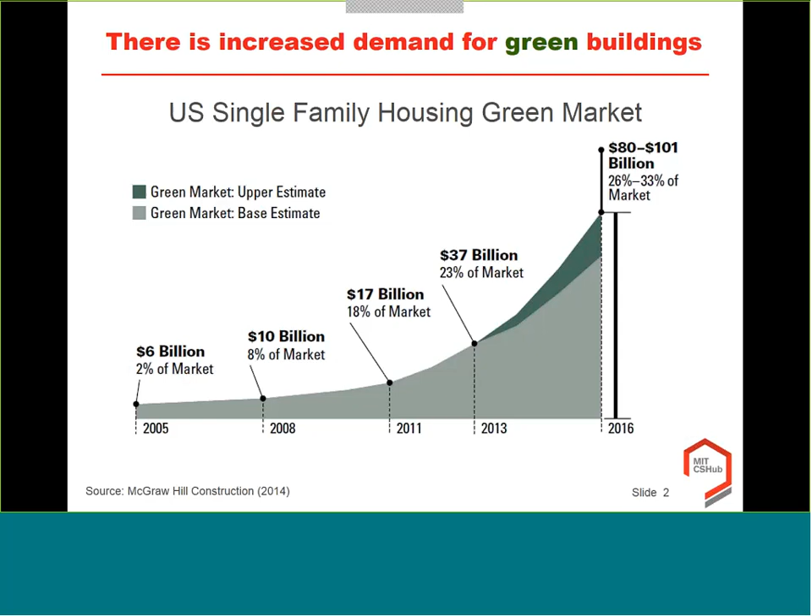Part of the motivation for our work is that there's a real increased demand for green buildings. This chart shows U.S. single-family housing green market projections done by McGraw-Hill construction estimates, and it shows really significant growth in the housing space. Here's another chart provided by the U.S. Green Building Council showing national LEED construction spending, and actually the rate at which the green building industry is growing is faster than non-green construction.

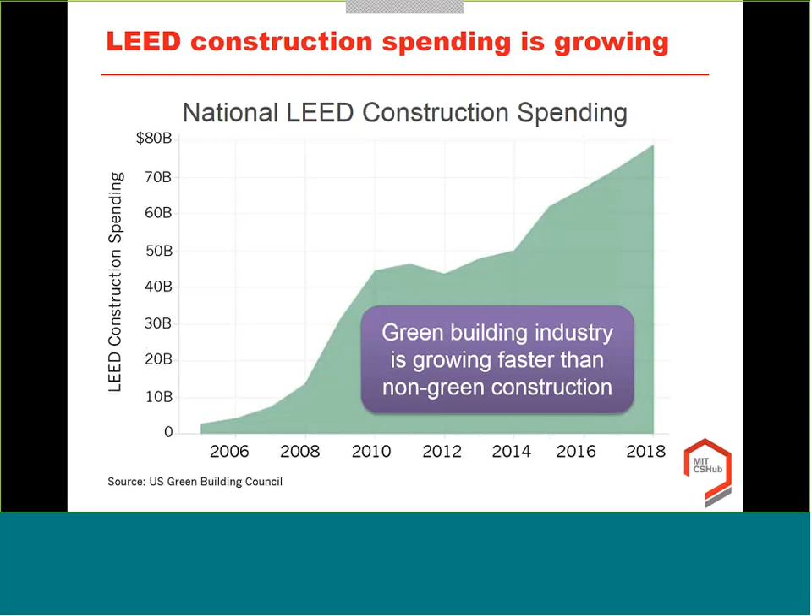One of the interesting things about what's driving this demand, and this once again comes from the McGraw-Hill construction study, is that client demand is one of those key drivers, whether it's in the U.S. or global. So clearly there's a lot of demand for green buildings, but we still have a question about what does it mean to be green. People say they want a green building, but how do you quantify that?

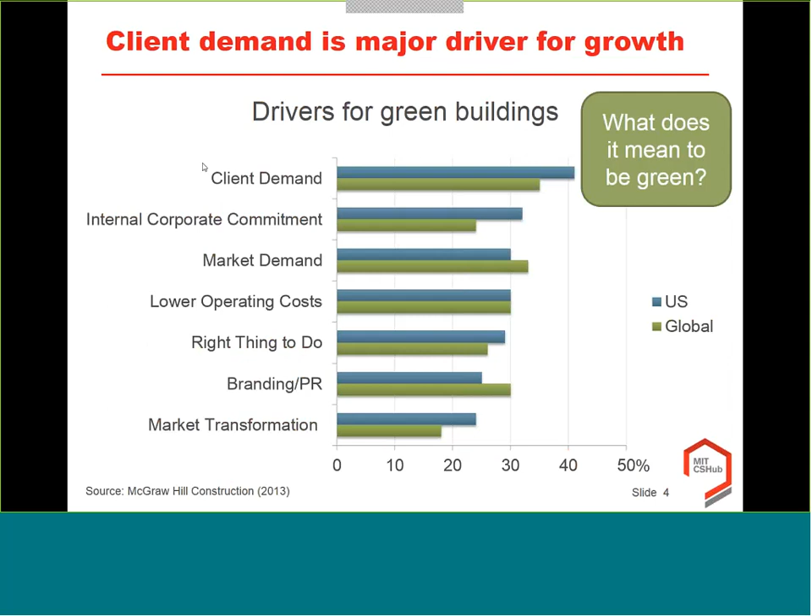We can actually draw some inspiration on this particular topic from another study that was done by UL, called the Sins of Greenwashing. It's a little out of date now, but I think the premise still holds. It's more about consumer products, but what they did is study many different types of products across a variety of sectors, whether it be electronics or office products. In 2009 they found

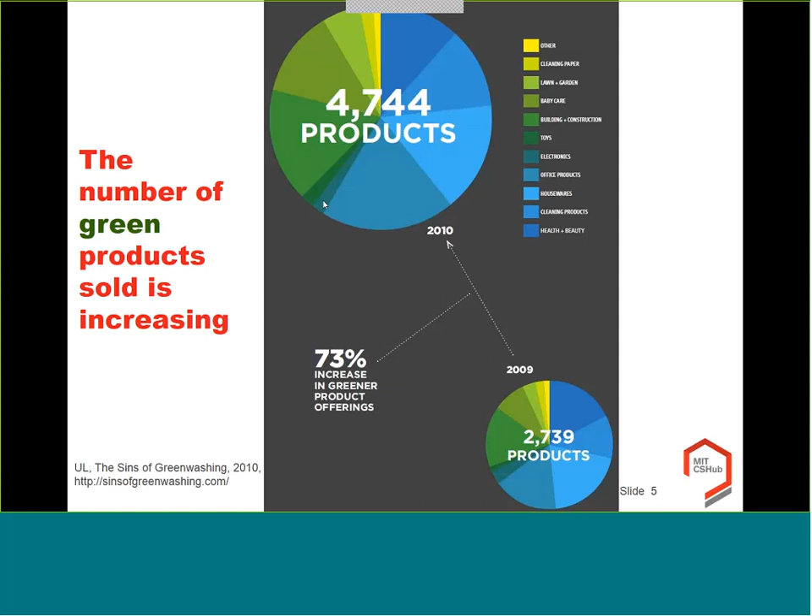about 2,700 products that claimed to be green, and in 2010 they found an increase even more, 4,700 or so. What they did is characterize whether or not these supposed green products had made claims that could not be justified, characterizing these as having 7 different sins of greenwashing. This chart shows the do-it-yourself building or construction sector, so not quite what we're going to be talking about, but also this is more like places like a Home Depot. Without going into a lot of the details, they basically found that pretty much all of the green products make at least one claim about them being green that may or may not be true. Sometimes it's just no proof, but sometimes they have a label that there isn't justification for. So clearly this is a hard thing to determine what green means.

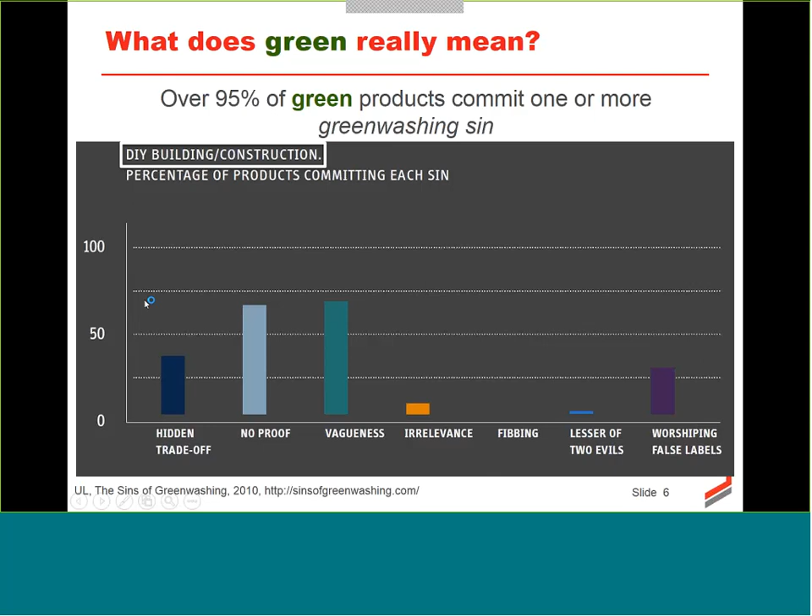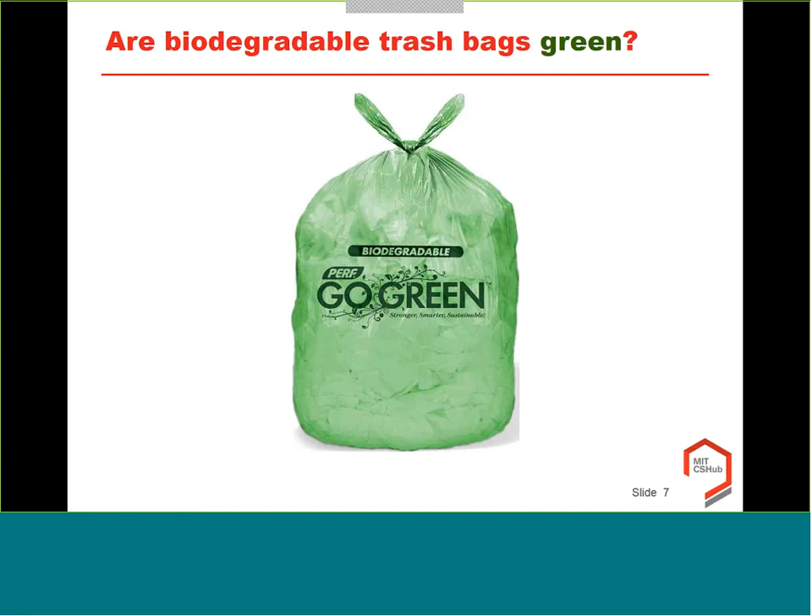One of my favorite examples is biodegradable trash bags. They make it really hard for you to think that they're not green because obviously the bag itself is green. But of course, the challenge is that if you put a biodegradable trash bag into a landfill, first of all, it probably won't degrade that much. And if it does, it actually will likely turn to methane, which is worse than carbon dioxide when it comes to climate change. So this is tricky.

One of the good things about what UL does in trying to address this is to be honest about the whole life cycle-based environmental impacts of your products, acknowledge them, and address them one step at a time. I really like that, and I think that's been a core part of what we're trying to do as well: analyze the whole life cycle perspective and then see what you can do.

This life cycle perspective is really important for these green claims, because the reality is there are many mechanisms for reducing environmental impact and cost. When we look across the life cycle of any product, people often will say, well, I have a green material because perhaps it used recycled content or it's low energy to produce. But there are other opportunities to have a green building, let's say in this case.

If you can design a building to use less material, i.e. by using a stronger material, then that can certainly help reduce environmental impact and possibly cost. The same thing with longer lasting designs. But there are other opportunities in the use phase, such as reducing energy consumption or heat island effects.

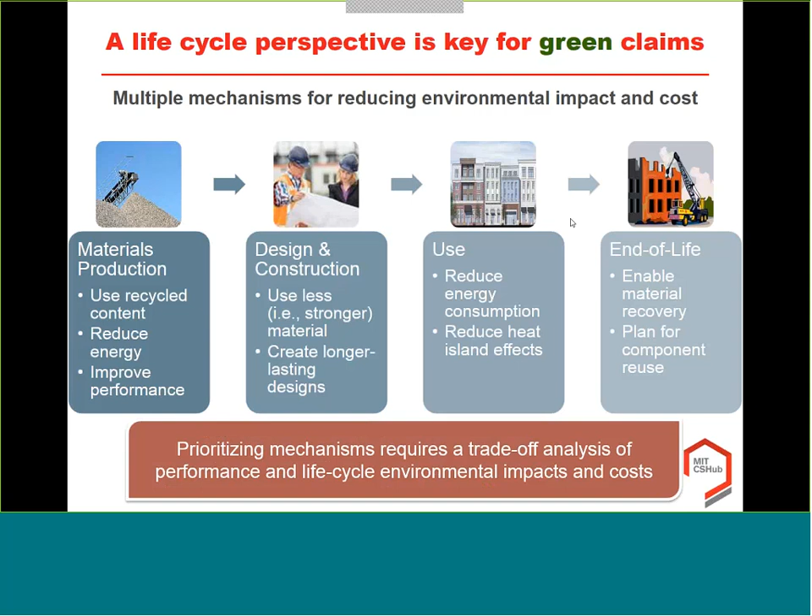And of course, anything that can happen at end of life, either by enabling material recovery or planning for component reuse, can be beneficial as well. The trick is that you really need to prioritize these mechanisms, and to do so, you have to do a trade-off analysis of performance, life cycle environmental impacts, and cost.

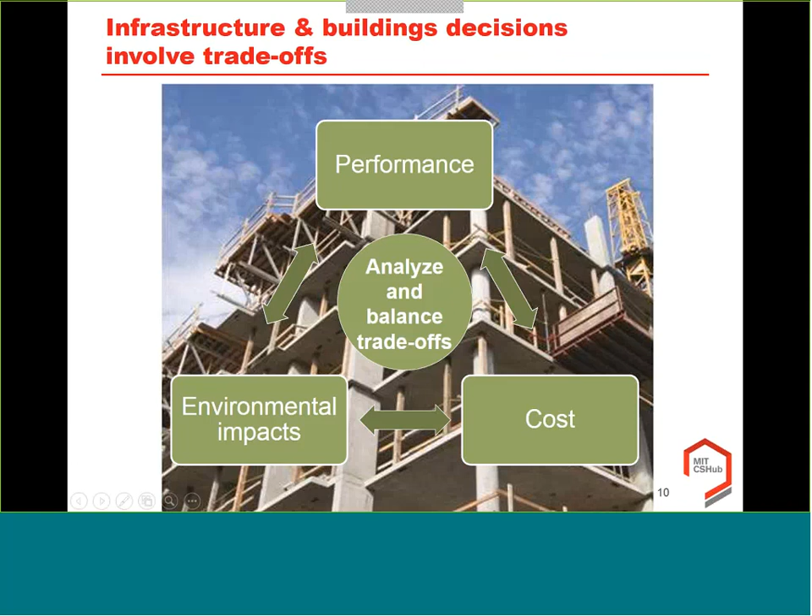This is really important for us to talk about. Keep in mind that we are asking to have something built because we're looking for some kind of performance, whether it be providing shelter, a working environment, or a retail environment. But there are trade-offs about cost and environmental impacts, and so we want to look at all those things together.

So when it comes to the research we're doing at the Concrete Sustainability Hub related to building life cycle assessment, our objectives are to identify the key drivers of building environmental impacts, the state of life cycle assessment in the building design process, and then to support early stage building design decisions with quantitative life cycle environmental impacts.

The approach we've taken is to conduct some detailed life cycle assessments, then step back and assess more broadly the state of life cycle assessment, and develop a streamlined life cycle assessment tool. In this presentation I'm going to spend time going into each of these topics, starting with conducting a detailed life cycle assessment.

For those who may not be familiar with the concept of life cycle assessment, it's basically an approach by which we quantify environmental impacts of a product or process from cradle to grave. We start by looking at digging materials out of the earth, transforming them into products or materials used to make different products, using those products throughout their life, and then disposing of or recovering them at end of life. So it's really what they call a cradle to grave or cradle to cradle process to quantify all of that.

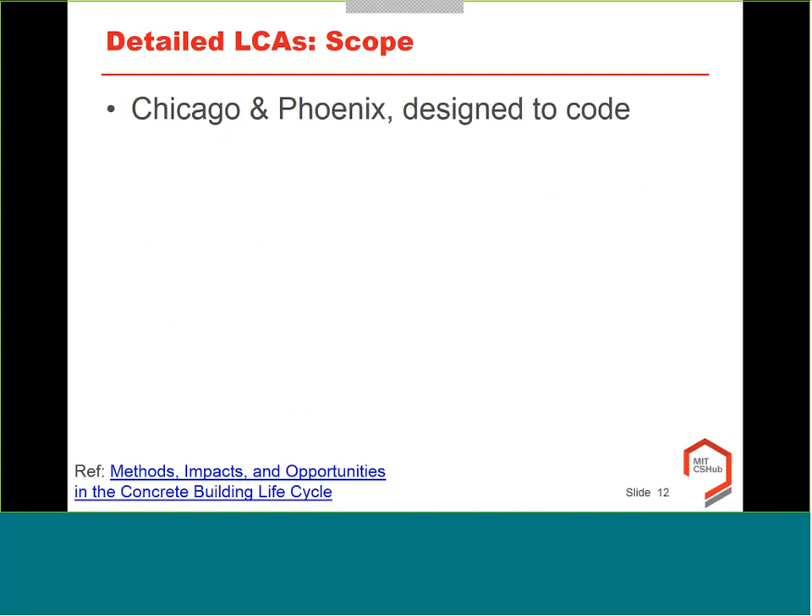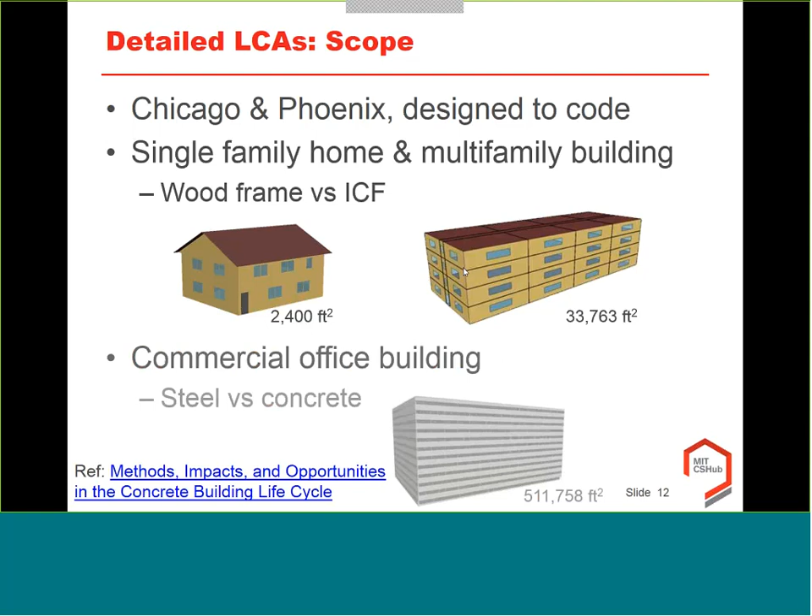When it comes to the detailed life cycle assessments we did in the Concrete Sustainability Hub, we looked at buildings in Chicago and Phoenix that were designed to code, and then looked at a couple different types of buildings: single-family homes and a multifamily building. We looked at construction of each using either wood frame construction or insulated concrete forms — a concrete technology where the forms used to make the concrete are actually insulated blocks that stay on site. This sandwich of insulation and concrete stays and provides the structural component for the building as well as insulation. We also analyzed a commercial office building constructed in both steel and concrete.

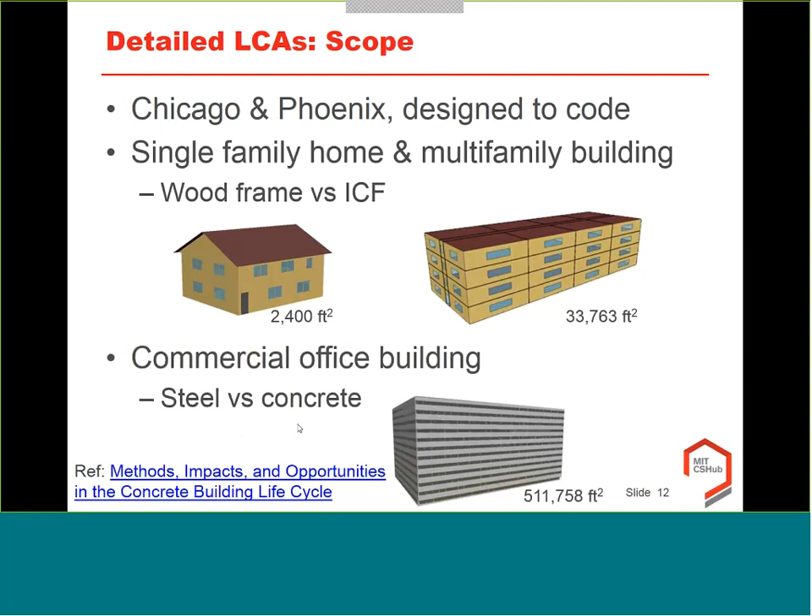There's a reference here — this title is on our website, and we have a link to it, which is one way to search for a lot more of the details. What I want to give you is just a high-level sense of some of the results.

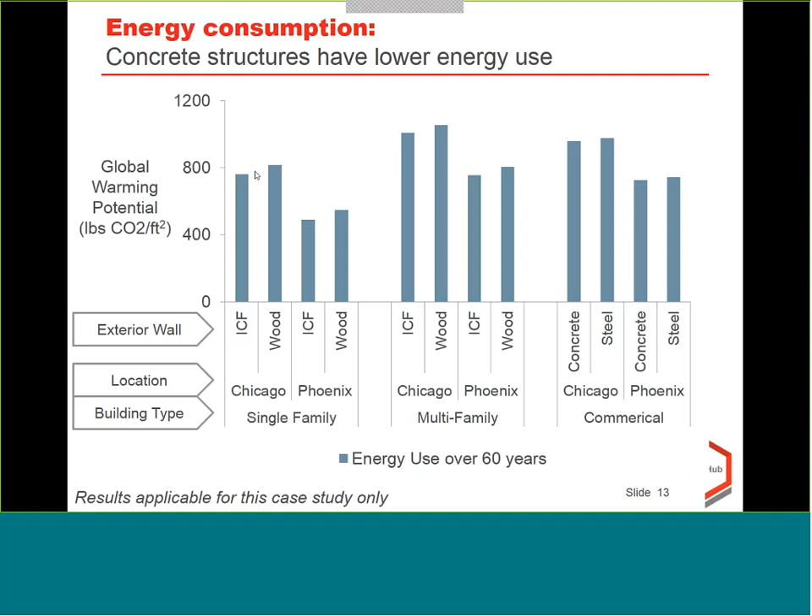So this chart is showing the energy consumption in those buildings over 60 years, which we assume to be the lifetime of the building. What's interesting is that generally, by a small margin — on the order of about 3 to 8% — the concrete structures have lower energy use.

What's also interesting now is if we look at the embodied impacts of the building. The embodied impacts are basically the environmental impacts associated with making all of these materials and then doing the construction on site. So the embodied impact for the wood and steel structures is lower for them.

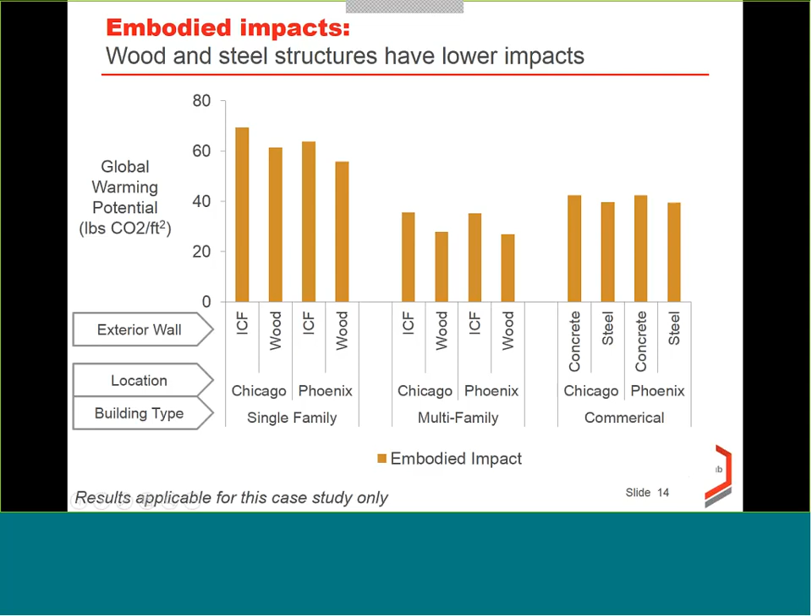Of course, what we also want to look at is what's the impact that these materials, the embodied portion, has on the energy use.

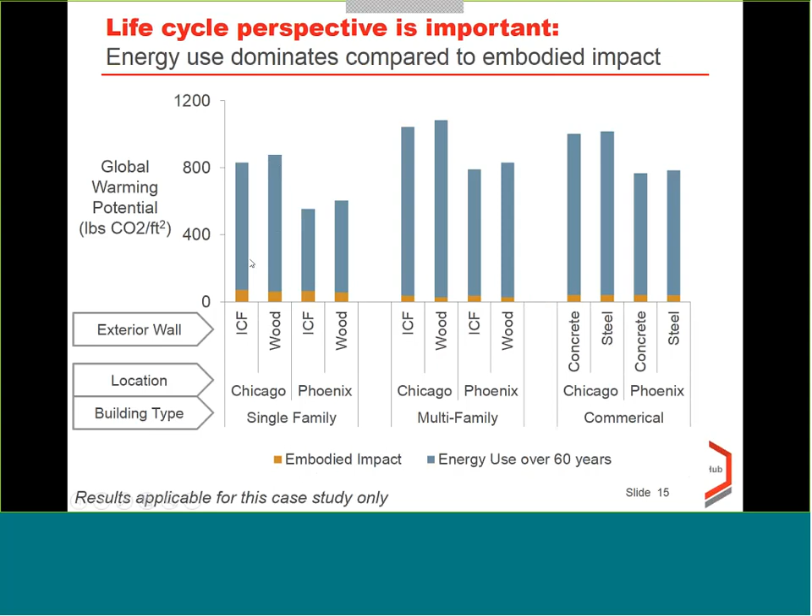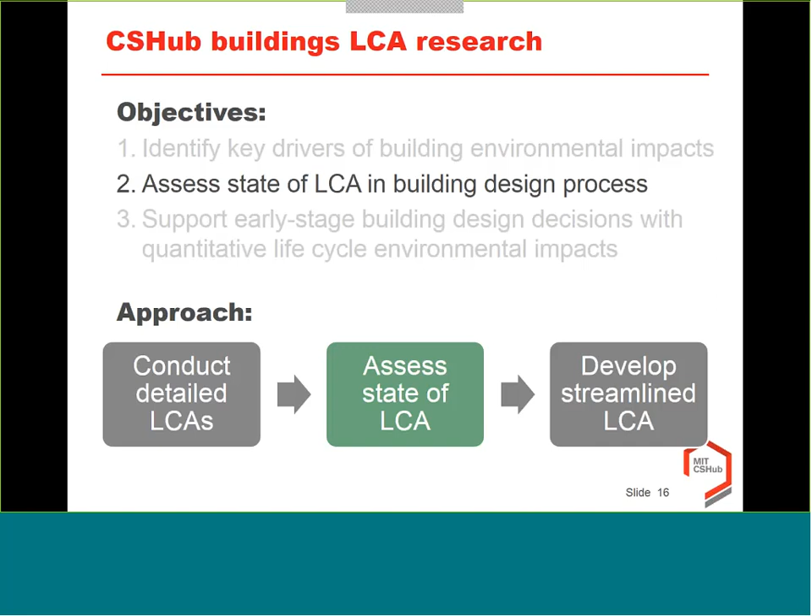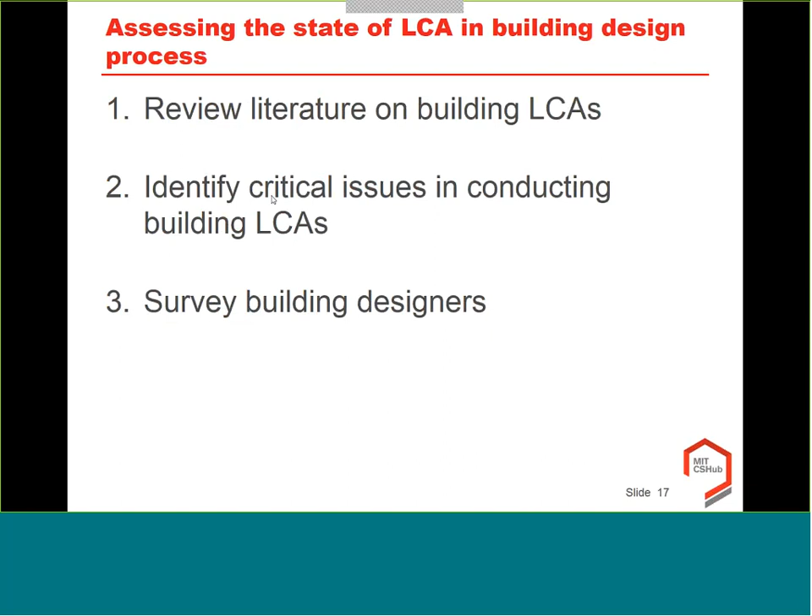All right, next topic. Our objective was to say more broadly, what's the state of life cycle assessment in the building design process? We did this through a few mechanisms. One, we reviewed the literature on building life cycle assessments to see what other people had published. Two, we did some studies to identify critical issues in conducting building life cycle assessments. And three, we did surveys of building designers. I'll go through each one, starting with the first.

There's a study on our website about this with a particular focus on residential buildings, and here are the key conclusions we learned from that literature review. One, comparisons are difficult due to variation in scope. For example, some studies look just at the embodied portion, some focus more on energy, some include end of life, some don't. So difference in scope makes it hard to compare across studies.

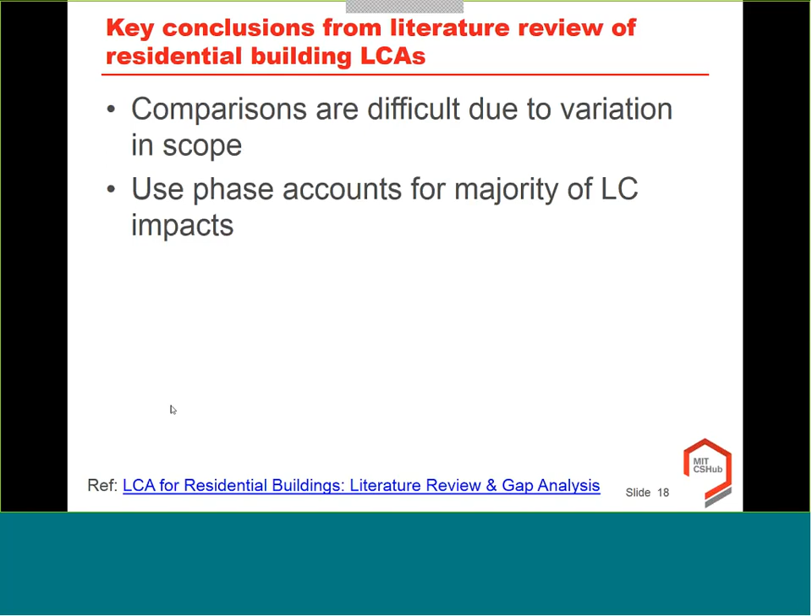However, one thing that's consistent across studies is that the use phase accounts for the majority of the life cycle impact in almost all cases.

What's also interesting is that for energy efficient designs specifically, there was significant variation in the fraction of the use phase to the total life cycle impact. In the context of the studies we were just discussing for different types of buildings, that use phase fraction was probably 80 to 90% of the total, and that number has particular variation. I'll show you a chart of that in a second.

But what's interesting is that even though there is uncertainty associated with the lifetime of these buildings or other elements in the data, it's generally not considered.

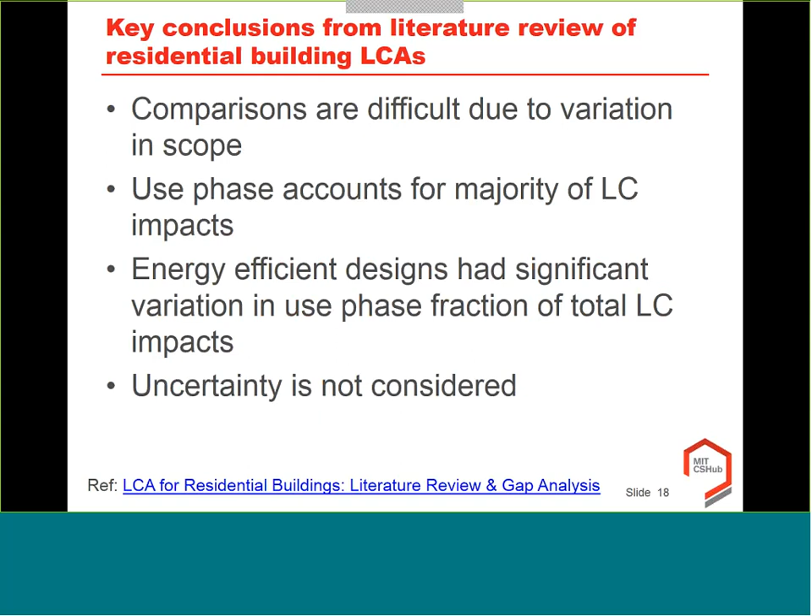We've summarized this point about the use phase and its fraction of the total, and each data point here represents different types of designs that are in buildings published in the literature. These are not necessarily actual buildings, they're studies done on building designs. The y-axis is basically, for that particular design, what percentage of the energy used is in the use phase as a percentage of the total, plotted as a function of the assumed lifetime of the building.

So for a longer lifetime, you would expect a higher fraction of energy consumption, just because you make that investment on day one in the embodied portion, but that's spread out over the whole lifetime. So the longer the lifetime, the smaller that embodied fraction is.

But what's interesting is that there isn't necessarily a clear trend. The different shapes here represent different types of buildings, and NA means they didn't specify whether it's energy efficient or code compliant. As we can see, some of these, the blue ones, are super energy efficient or energy efficient. Red means they're not code compliant, so they might have worse energy performance. We do see a lot of those having the energy performance dominate.

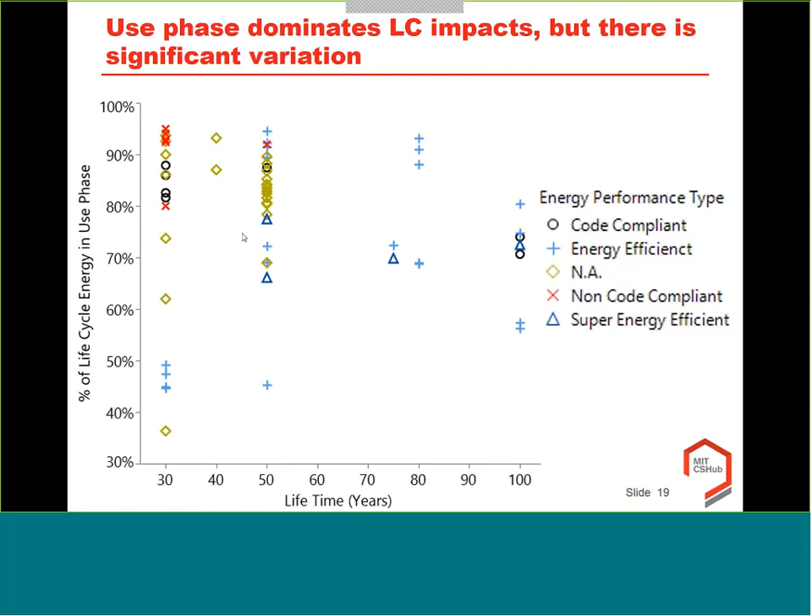But even on some of these that are considered energy efficient or super energy efficient, which one would expect to have a higher fraction of embodied environmental impact, we're still talking, even in some of the best cases, 50-50, and here's one that's quite low, in the 30s. So generally what we see, across most of these cases, is 75% and higher, except for some outliers. The key point is that the use phase really dominates this life cycle impact, but the exact amount depends on the particular case.

Another thing that we did in surveying this whole field is, after looking at the literature and spending some time looking at standards and things like that, a study called Comparing Whole Building and Building Product Environmental Performance. It's actually less of a study and more basically our synthesis of the critical issues when comparing building environmental performance.

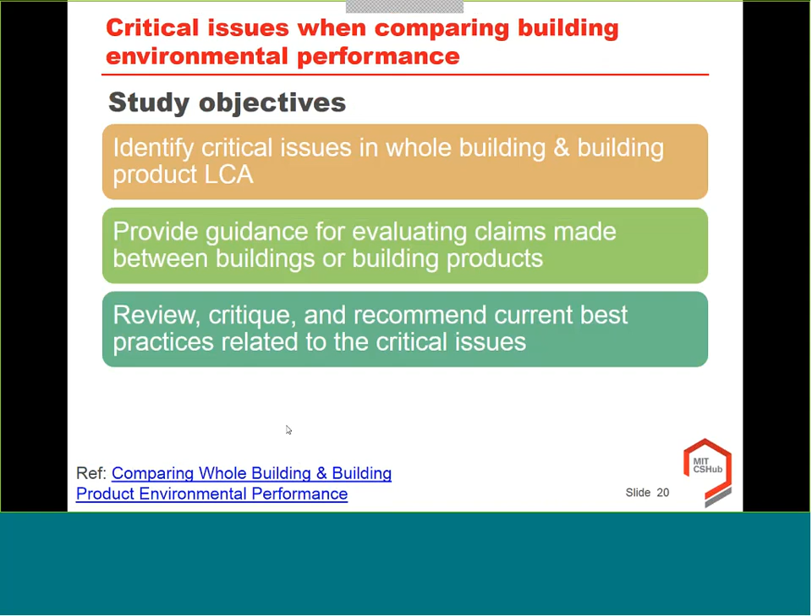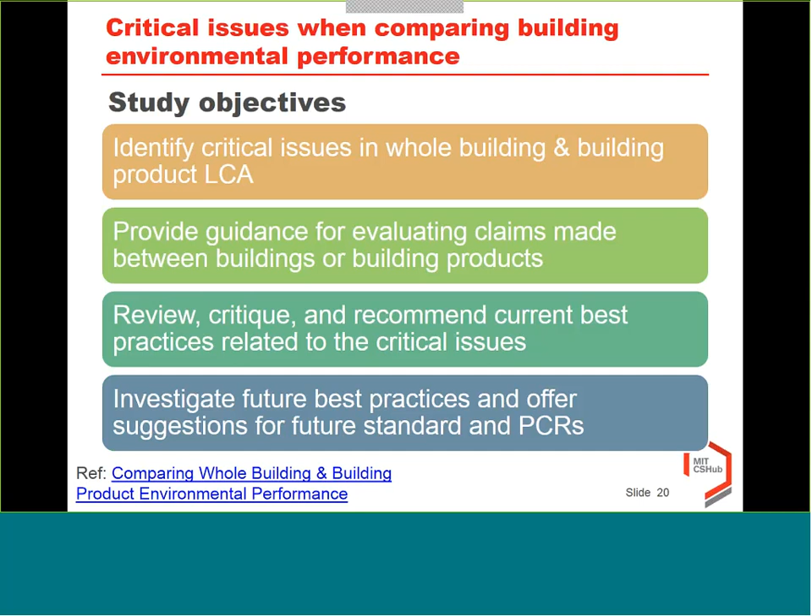What we wanted to do with this study was identify the critical issues in whole building and building product life cycle assessment, and provide guidance for evaluating claims made between buildings or building products, because this is becoming something people are much more interested in. We also wanted to review, critique, and recommend current best practices related to those critical issues, and investigate future best practices and offer suggestions for future standards and product category rules—the rules used to conduct a life cycle assessment when it's going to be used in an environmental product declaration, which is basically a summary of the environmental impacts for a particular product.

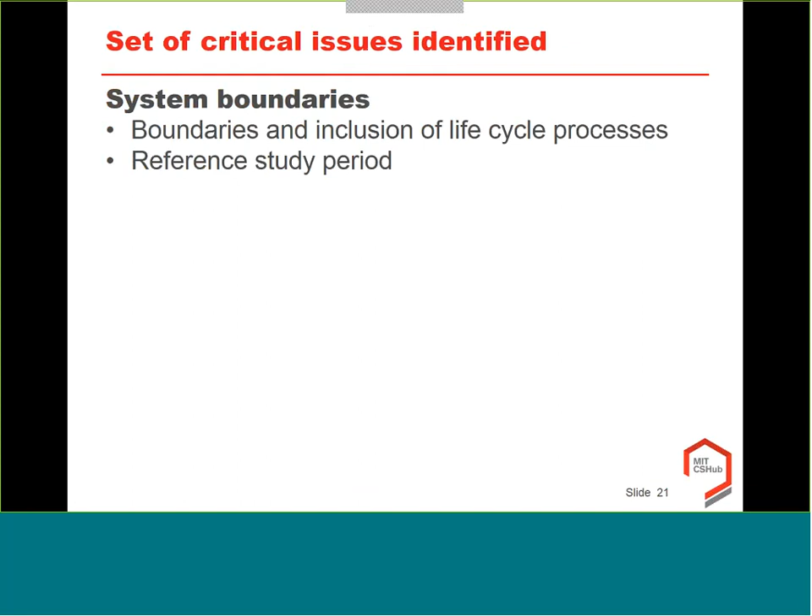So at a high level, these are some of the critical issues we found in the study. First, when it comes to system boundaries, it's really important to identify what the boundaries are and which life cycle processes are included, and also to define what the reference study period is—that is, are you assuming the building has a 40, 50, or 60-year life, because that variation is significant.

Then there's a lot of elements in what we call the analytical approach—basically how you do the calculations. These are things that we think really there's an opportunity for either consensus, or it's just important to be really transparent about. So what's the criteria for functional equivalence? How do you do comparisons of different types of buildings? The location really matters because obviously that affects the energy consumption.

The treatment of time really has to do with a lot of the elements, particularly around releases of biogenic carbon, which come basically from plants or trees, and so that can be a critical issue. How uncertainty is treated, how allocation of different impacts is treated—particularly at end of life—and then how end of life, operational energy, and biogenic carbon are treated.

There's a lot more detail in the report about what we mean by that, but essentially what we found is that until some of these things have more consistent definitions, it's hard to do comparisons across different studies.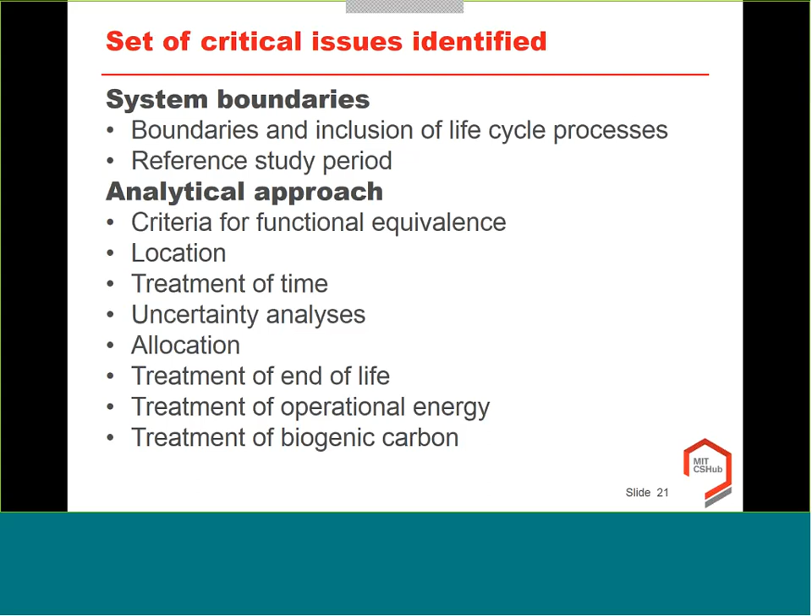All right, last topic within this space is some surveys and focus groups that we did with architects. We surveyed 16 architectural firms along with some home builders and developers, and then did some focus groups in the Boston area with architects.

Some of our key questions were: when in the design process are decisions being made? When do you choose specific windows or specific types of wall systems? Which tools are used throughout the process? And what are the challenges to utilizing LCA?

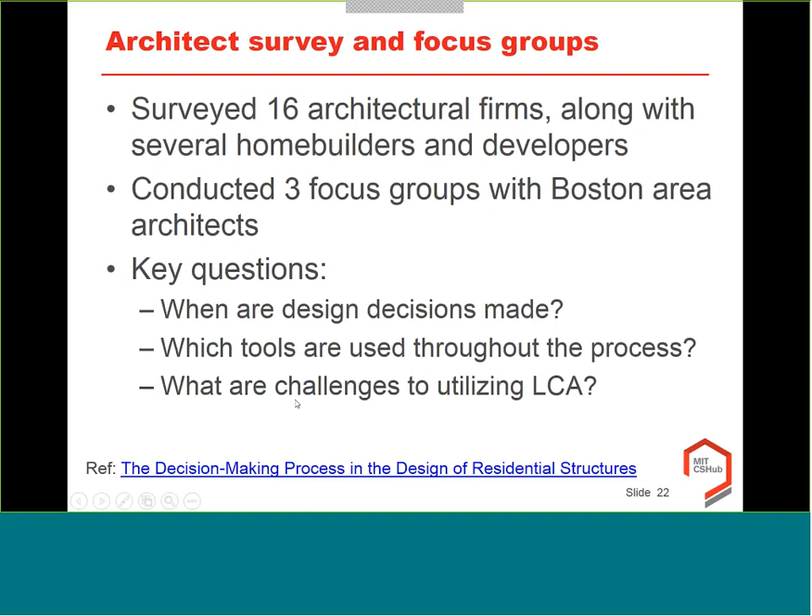The reference for this is also on our website, but it's a report. Some of the key findings were that details are not available until late in the design process. This is showing how the design process progresses, starting with conceptual design, then schematic design, then design development and construction documents.

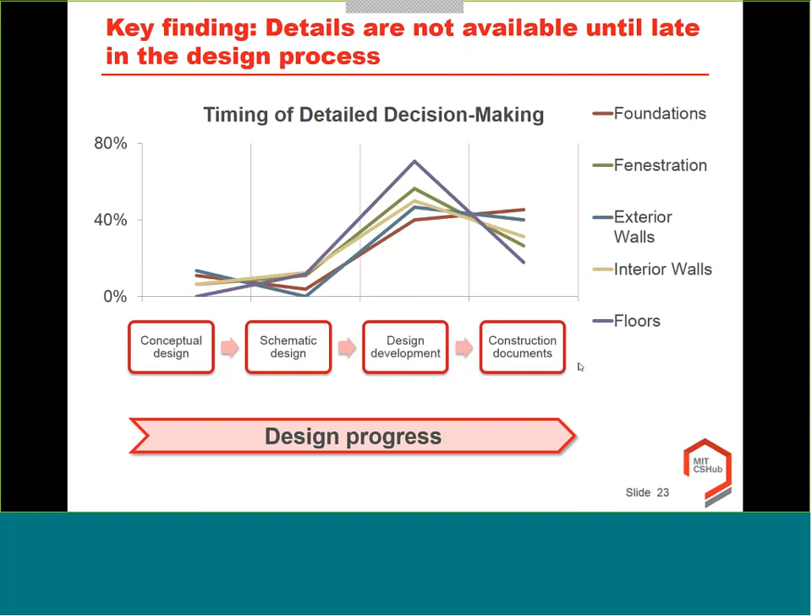This is showing basically when detailed decisions are being made for different elements of the design. What you can see is that pretty early on, there aren't a lot of details made, so you get a lot of those details near the end of the process. That's going to have implications on how you do a life cycle assessment, based on when the data is available about what's being used in the design.

So what are the key findings of the surveys and the focus groups? A few things we found. One is that details are not available until late in the design process. We also found that there was limited demand for life cycle assessment from customers, combined with the fact that LCAs were considered too costly or time-consuming, and it prevents the use of life cycle assessment much in the process.

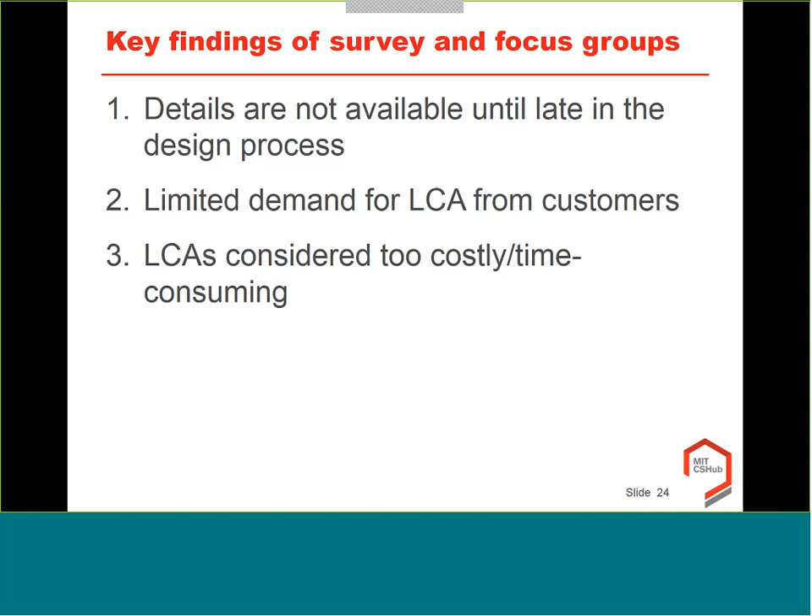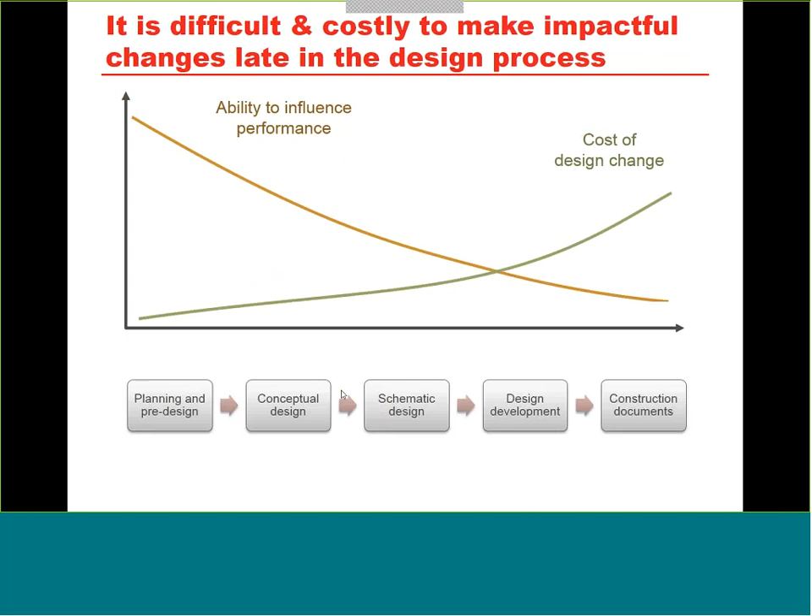So what that really means is that when we look at this design process, your ability to influence performance actually happens early on, in the planning or pre-design or conceptual phases. That's when you can have the most impact. But of course, your cost of design changes increases as time goes on.

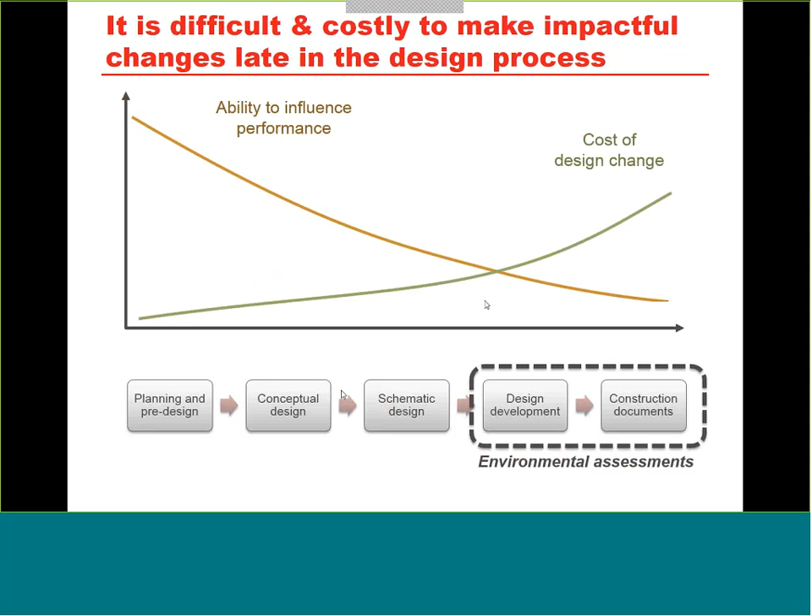So what currently happens is that environmental assessments are done here because that's when a lot of the details are available. But as you might imagine, you can't really do much with that information because it happens at the end of the design process.

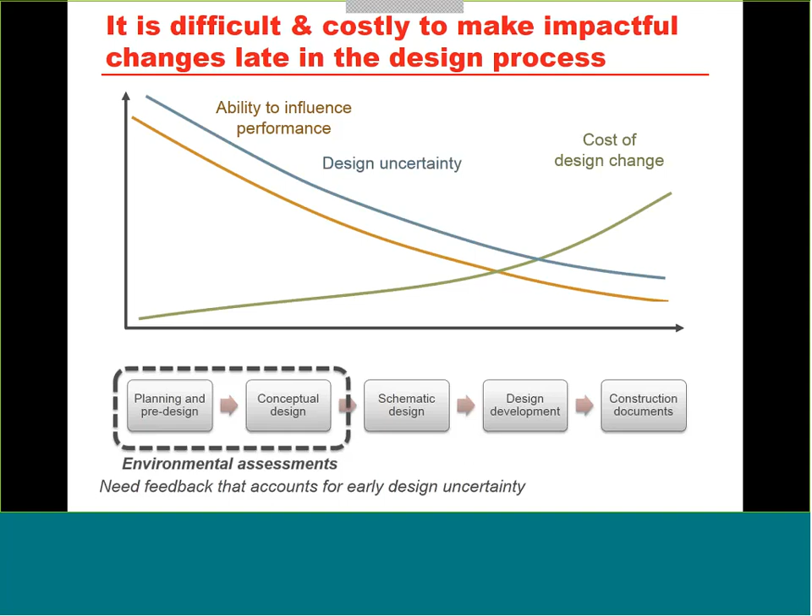So what we'd like to have happen is to shift this earlier in the design process, and even when details aren't available, we'd like to have feedback that accounts for that early design uncertainty. Because early on in the design process, you have a lot of design uncertainty, and that decreases as you go on and get more specific about what's in there.

Fortunately, LEED has started to incorporate life cycle assessment into its process. The LEED standard, as many of you are familiar with, is trying to incentivize people to do green building by providing a rating system, and they have different categories for points.

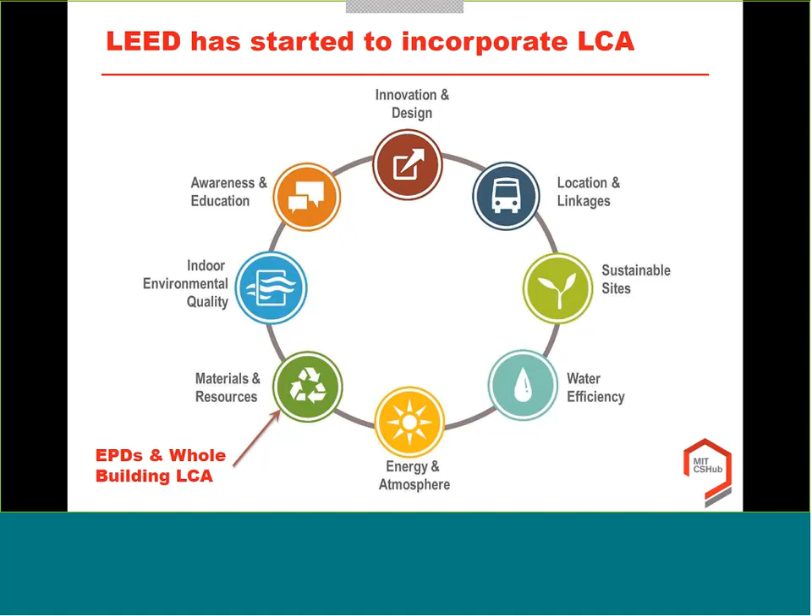So while that's great, the key thing to keep in mind is that those life cycle assessments have pretty limited scope. For example, if we look at this as the life cycle of a building, the environmental product declarations really just cover resource extraction and manufacturing. The whole building LCA includes all those components, but then also the on-site construction.

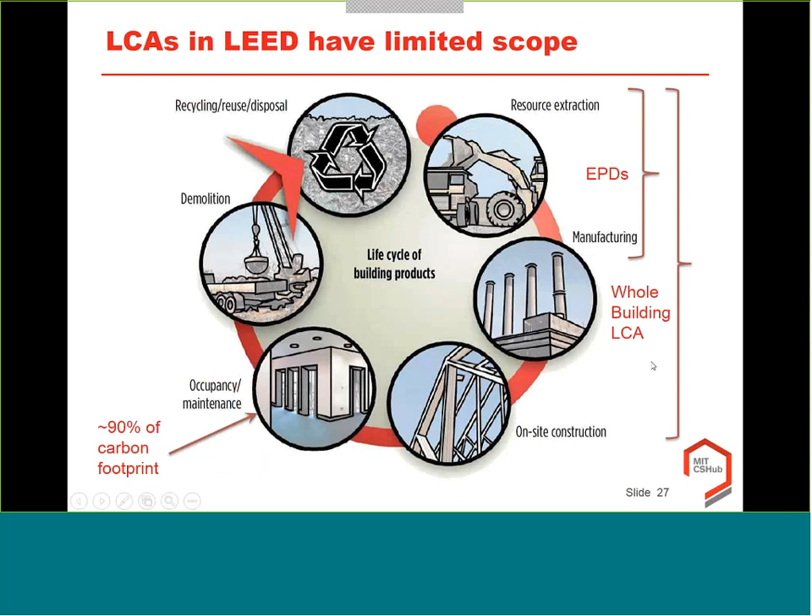Whereas what we saw before is that, depending on what you're talking about, 80-90% of the carbon footprint is often associated with the occupancy or use phase of the building. So that's a tension there. I think it's a great start to have these things in LEED, but we'd like to try to shift that to looking at the whole life cycle.

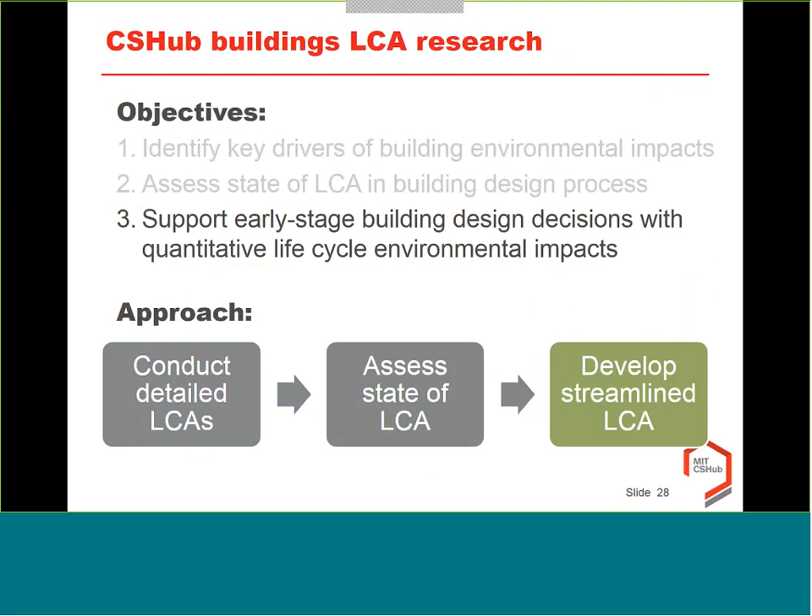That brings us to our last element of this talk, and it's our objective to try to support early stage building design decisions with quantitative life cycle environmental impacts, and we're going to do that with a streamlined LCA.

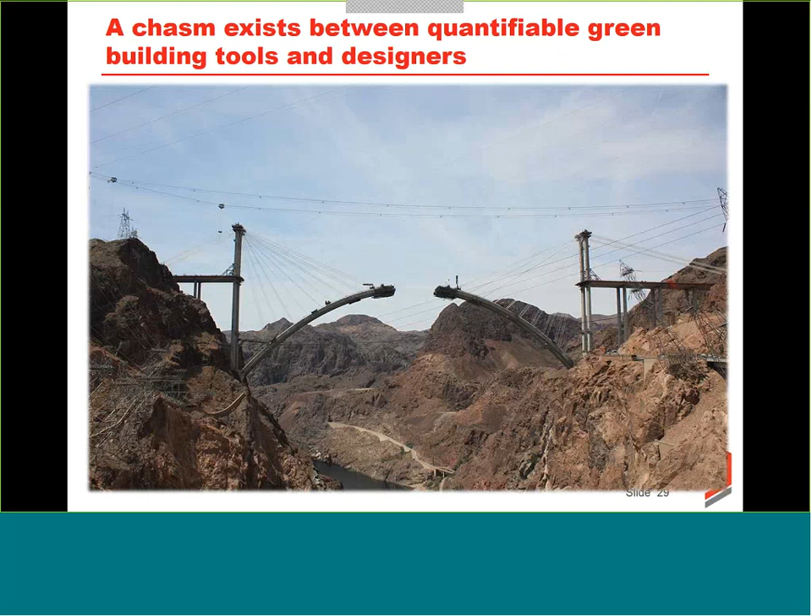So what we really found when we did all these studies is that there's this chasm between quantifiable green building tools and designers. On one hand there's quite a bit of building LCA literature and tools, but on the other hand, you have architects and builders and developers, and most of them aren't using them. So even though they're modeling energy consumption, they're not taking that full life cycle perspective.

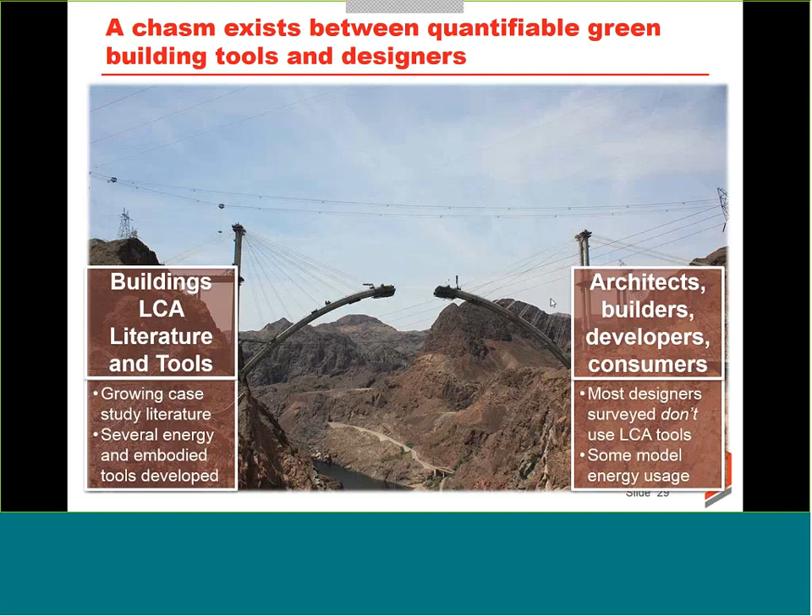So what we're trying to do in our work is to bridge that chasm. But I think part of what's going on here is that there's a tension in life cycle assessment, a balance between the cost of doing a life cycle assessment and the credibility.

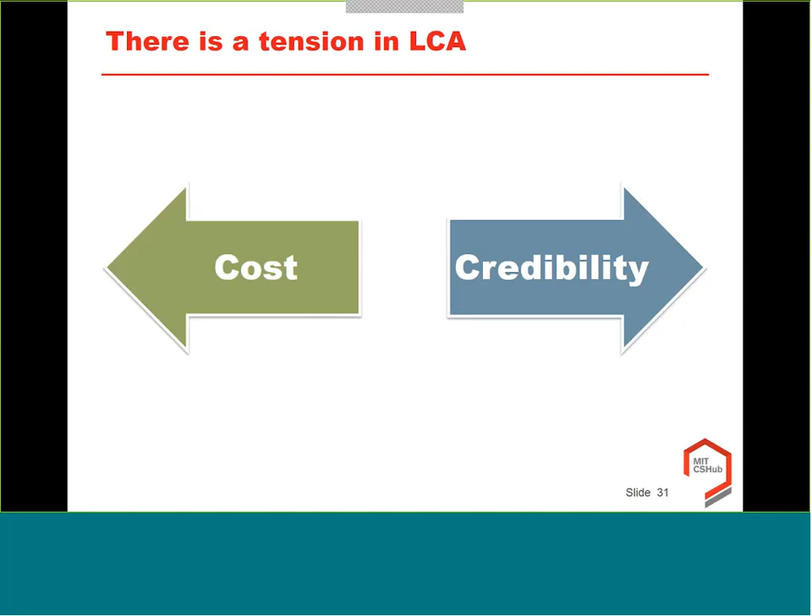Obviously you can have a low cost life cycle assessment, but it will likely have a low credible result. So the standard in building LCA right now is to do a high cost and high credibility approach. It's great to see people pursuing a high credibility approach, but the high cost is what limits it.

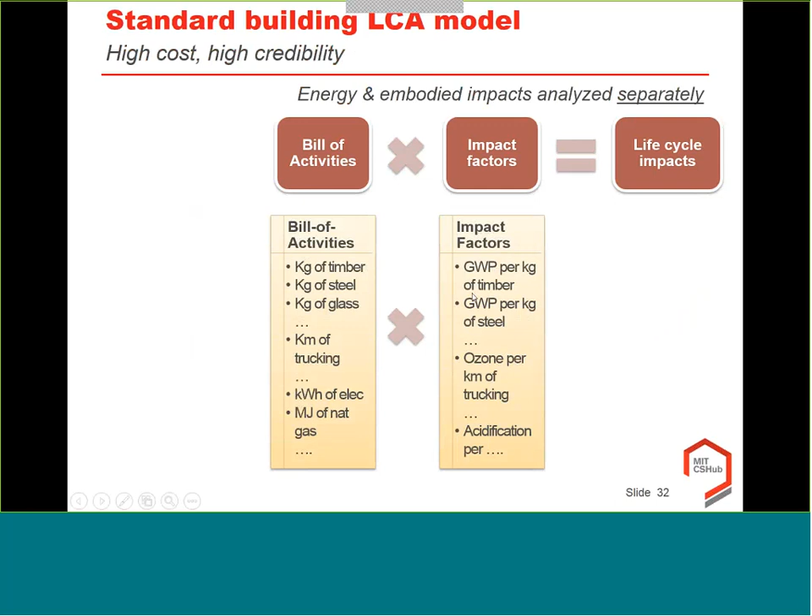Generally, what happens is that you need to generate what we call a bill of activities, which includes a bill of materials, the materials that go in, but also things like transportation distances, energy, and then you can multiply that times impact factors like global warming per kilogram of timber, or ozone impacts or acidification, and from that we get the life cycle environmental impacts.

Typically when that's done, there's an energy analysis that's done, and the embodied analysis is done separately. But to do that, you need to start out with a description of the building, and then some type of approach to translate that description into all this data that you need in the LCA. A lot of this stuff in the bill of activities is not necessarily things that architects need to do for the designs. They're not typically generated.

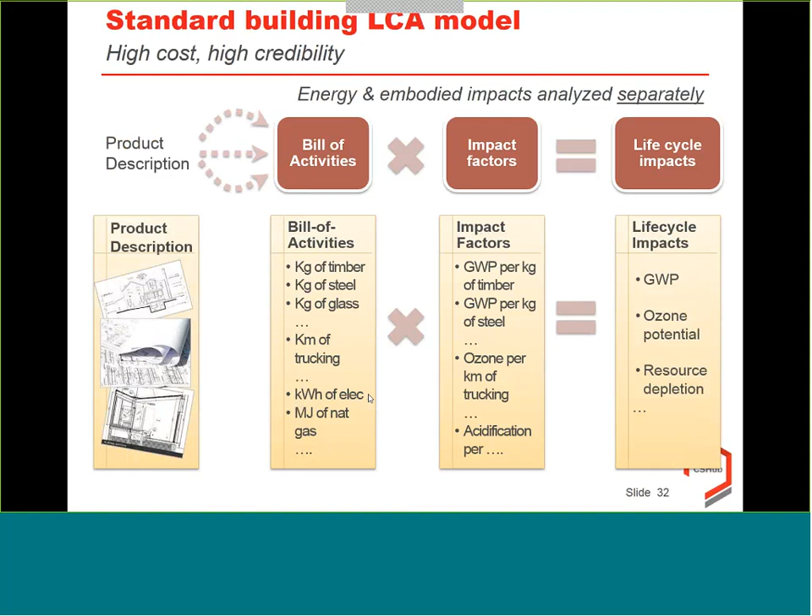So the approach that we're developing in our research group is a streamlined approach. What we're doing is trying to reduce cost while maintaining that credibility. So we call it the building attribute to impact algorithm. A key component of it is that the energy and embodied impacts are analyzed simultaneously, and a big reason for that is because we want to be able to look at these trade-offs between these different elements. So we have a couple different ways that we get this to work.

One is what we call attribute to activity models. What we do is we take product attributes, like in this case attributes of the building, and then translate that into a bill of activity. So there are algorithms to do that for materials, for processes such as construction, and also energy inputs like electricity and natural gas consumption.

We also have an approach that we call under specification, and this is basically using low fidelity and high uncertainty data. So rather than being very specific about what type of data goes into the model, we allow users to use pretty generic or underspecified data. For example, rather than saying exactly what kind of wall system you're using, we just allow you to say, I'm going to use any kind of wall system. And then we account for the fact that if you're going to be that generic, that's fine, but we're then going to calculate impacts across the entire spectrum of wall systems, whether it be wood, steel, concrete, and then we'll capture the uncertainty of that.

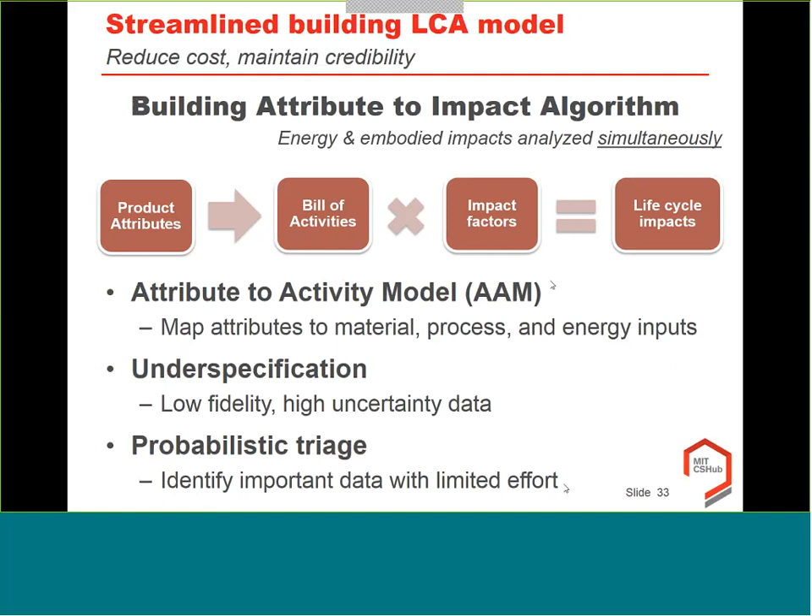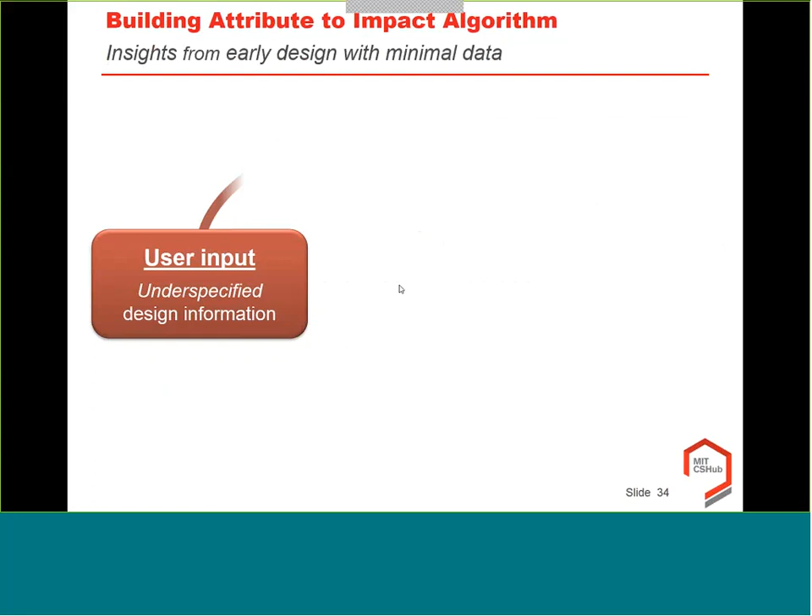So how it works is that basically we start out with a user providing underspecified design information. So you can be underspecified on pretty much everything about the building and the materials that you're using — underspecified on the size of the building, the number of windows, you name it, the orientation of the building, the type of roof.

And then what we do is we run the model with a whole bunch of different simulations that account for that uncertainty. Those simulations are done using a Monte Carlo approach, which basically is what allows you to look at a whole bunch of simulations. Then you get a result that looks something like this. You get a total amount and a breakdown on how much is associated with the use phase and how much associated with embodied impacts, and a key element is that it has this range of results.

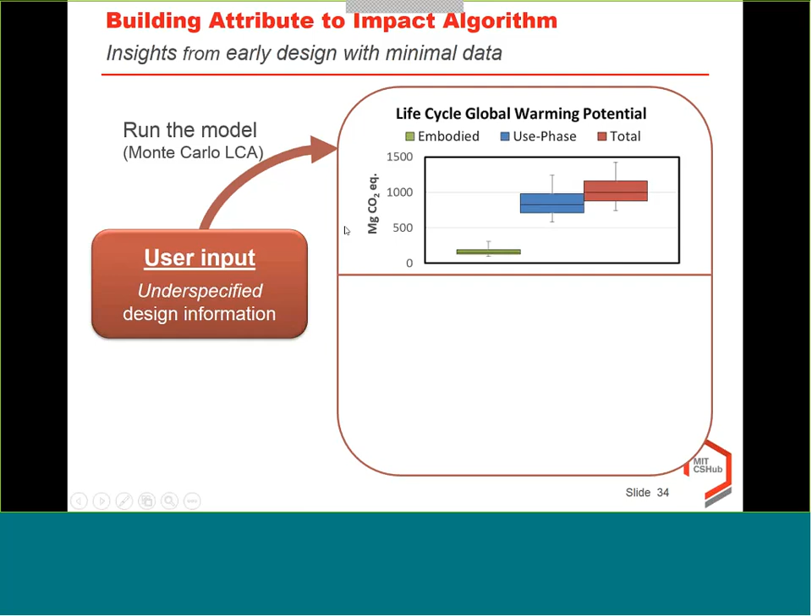So the underspecification allows for that, but what we also get from the probabilistic triage is what are the top priority attributes. In this case, we learned that your attic insulation, your roof deck, and your window type are the top elements that are contributing to the uncertainty in this result. As a consequence, you might want to be more specific about these.

So provide more detailed information. Rather than just saying any kind of attic insulation, you may want to say, I just want to use batt insulation. And you don't even at that point need to get into a specific R value — you can just provide a bit more specification on it.

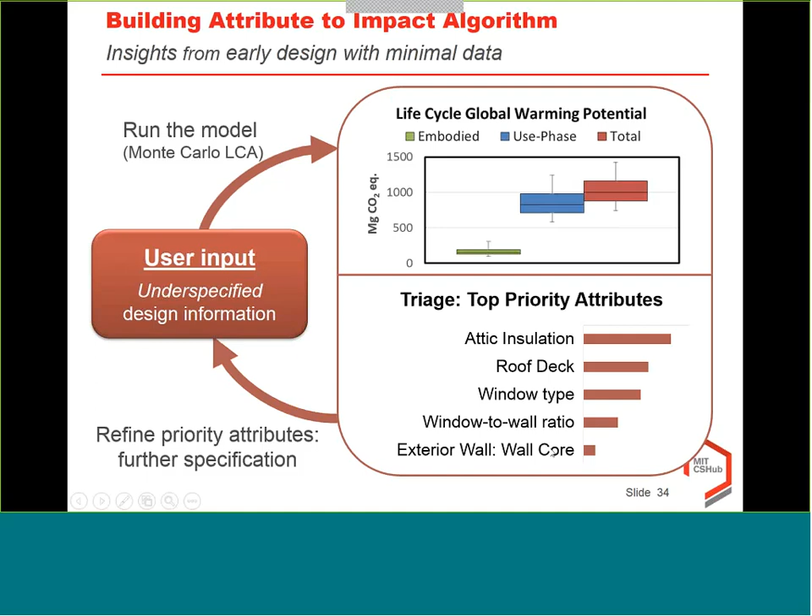And then after you refine those priority attributes, you can then run the analysis again and see what kind of results that you get. So this type of iterative approach allows you only to specify the things that really matter, and everything else you can leave generic.

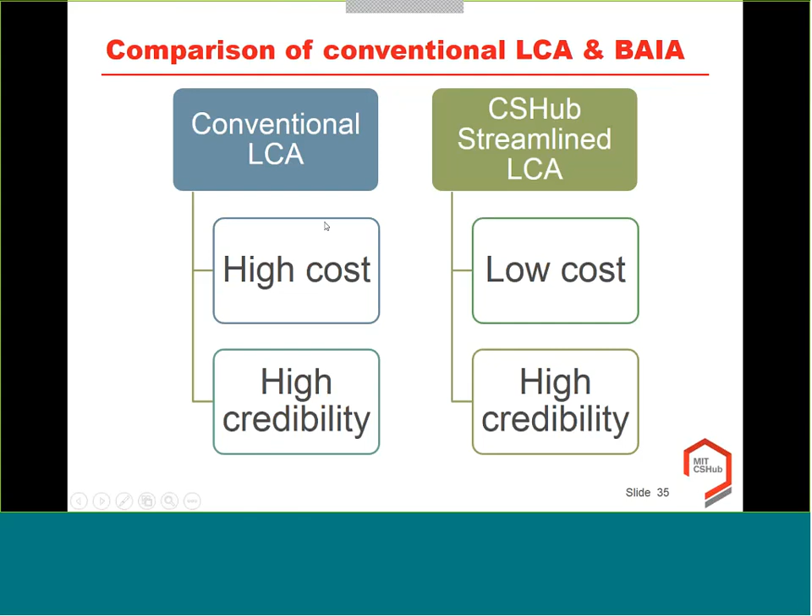So when we compare these two approaches, remember that a conventional LCA will have high cost and high credibility, whereas what we're trying to do is develop low cost and maintain that same high credibility.

In more detail, a conventional LCA approach has a high level of detail, whereas the BAIA, or the Building Attribute to Impact Algorithm, has a minimal level of detail. Usually in a conventional LCA you need a lot of details as inputs, whereas what we're using are what we call design attributes as inputs.

Just tell us about the attributes of the building that an architect would consider, like things about orientation or window-to-wall ratios, things like that.

In a conventional LCA, details are always specified, whereas in BAIA you only need to specify details when it's really necessary for the result. A conventional LCA has to be used late in the design, whereas what we're doing can be used early in the design process.

Usually a conventional LCA has energy and embodied impacts analyzed separately, whereas what we're doing has them analyzed simultaneously. And of course, uncertainty is always quantified.

In a future webinar, we'll be getting into a bit more detail on that particular streamlined approach. But this is just an introduction to it.

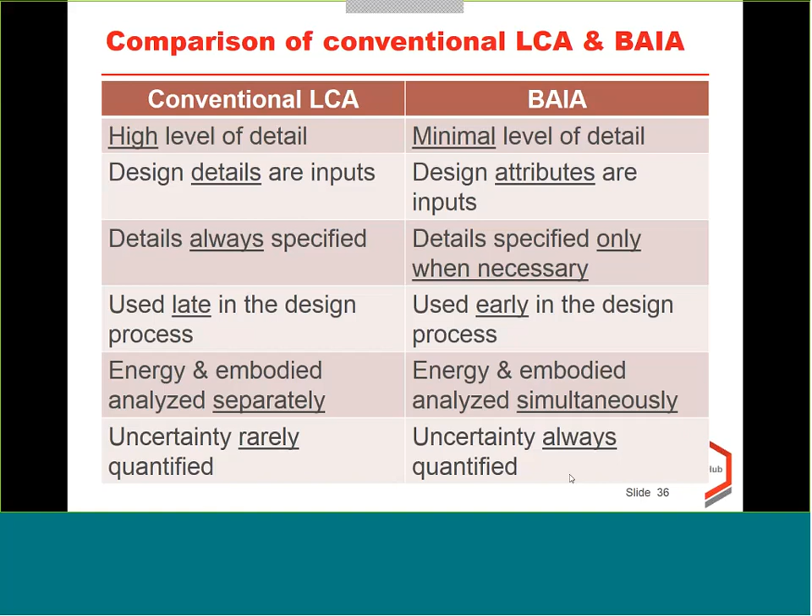So, in summary, what have we learned? Getting back to the research objectives, the first was to identify the key drivers of building environmental impacts. We found that analyzing the complete life cycle is important. In many cases energy consumption is a particularly big driver, but it can also be of interest to analyze the embodied impacts as well.

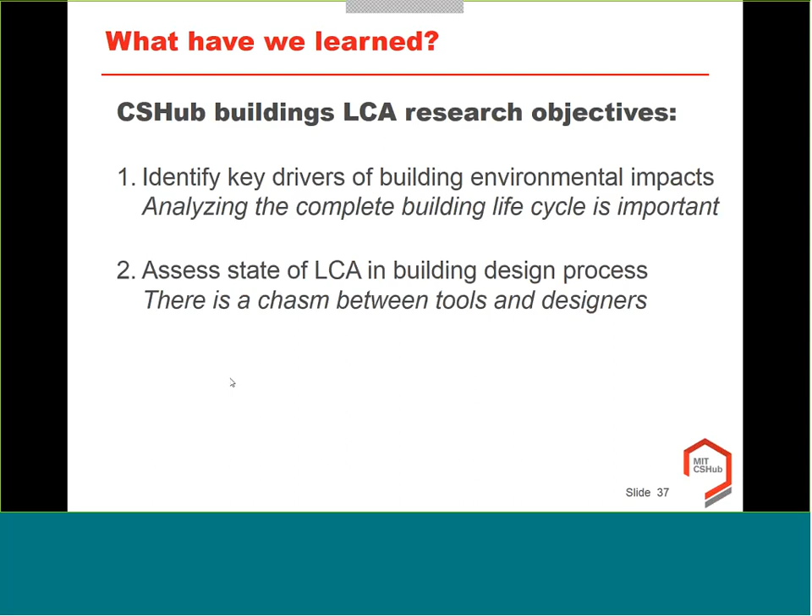When it comes to the state of life cycle assessment in the building design process, we found that there's really a chasm between the tools and studies available and the designers who might use them. And lastly, a streamlined life cycle assessment approach can be used early in that design process.

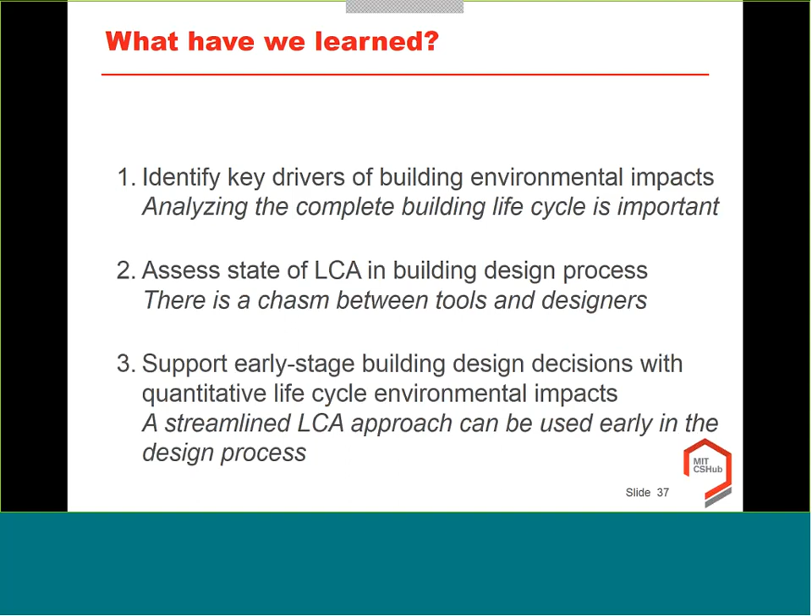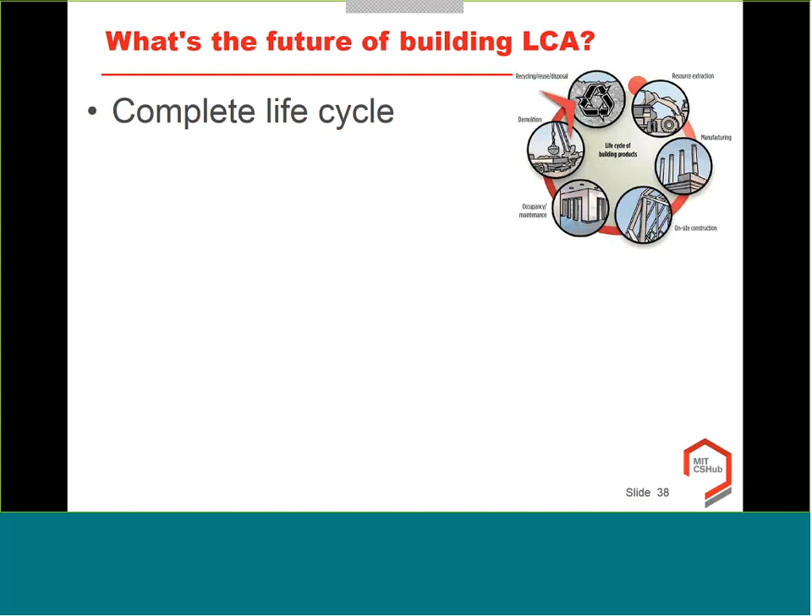So what's the future of building life cycle assessment, at least from our perspective? Where do we think it's headed? I think the complete life cycle is going to become a more important element, not looking at embodied and operational energy separately, and I think that will also manifest itself in a more holistic approach to sustainability assessments.

Right now we have all these different topics in LEED analyzed separately, and I certainly understand why, but I think we'll likely see in future versions a bit more crosstalk among these different elements.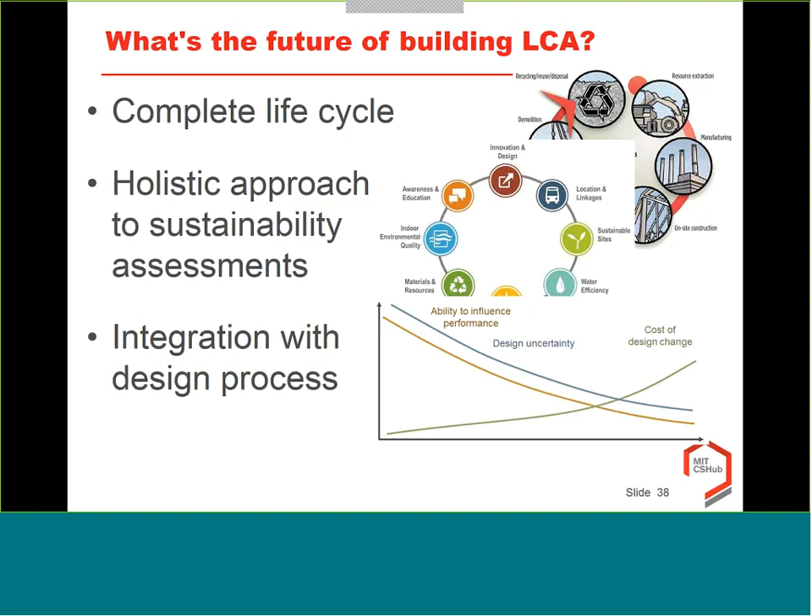I also see an integration of these types of approaches with the design process when they can be used early on in the design process. And lastly, we think there are opportunities to incorporate resilience into life cycle assessment as well.

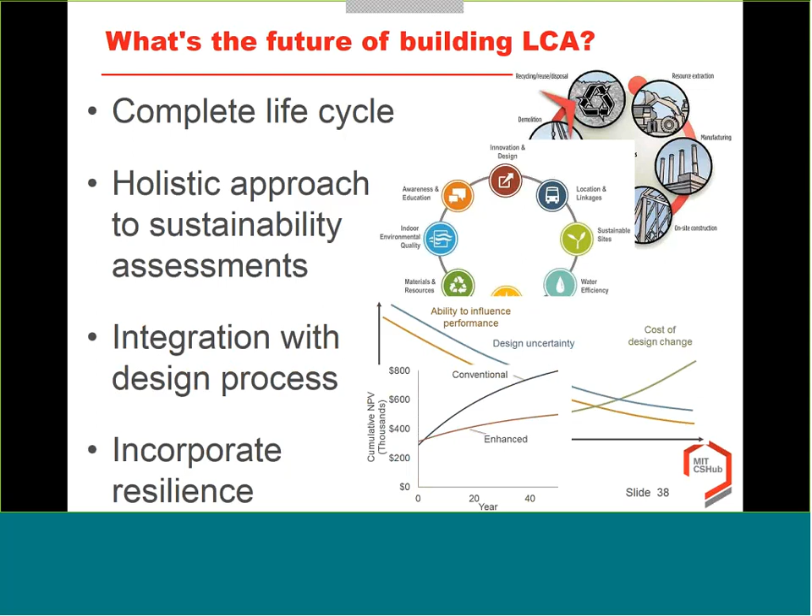If you attended a previous webinar we did on our work in the building space, you know we have some approaches to account for that when it comes to costs, and I think we're actually already starting to see some of this in the life cycle assessment space as well.